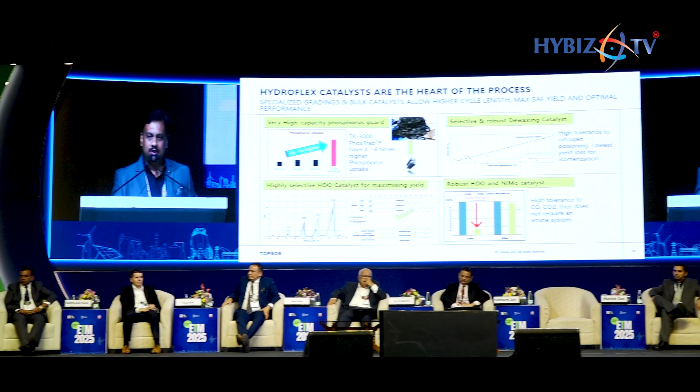Topsoe also has a robust dewaxing catalyst and a highly selective HDO catalyst, which prefers the HDO route.

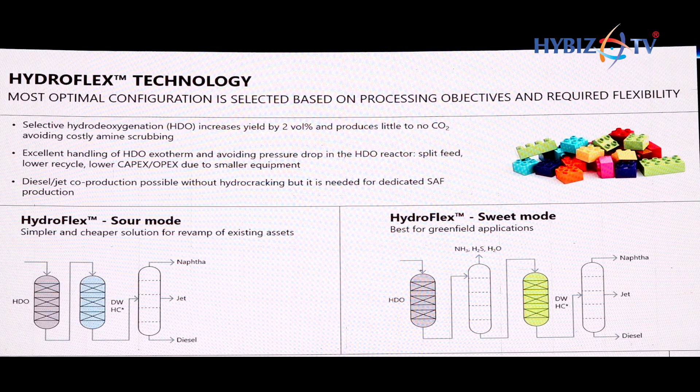If we go into the process, there can be two modes: sour mode and sweet mode. The only difference is that in sweet mode, the sour gases are removed prior to the feedstock going into the dewaxing reactor. Sweet mode can be a bit more on capex, but it gives higher yields, so NPV comes out better.

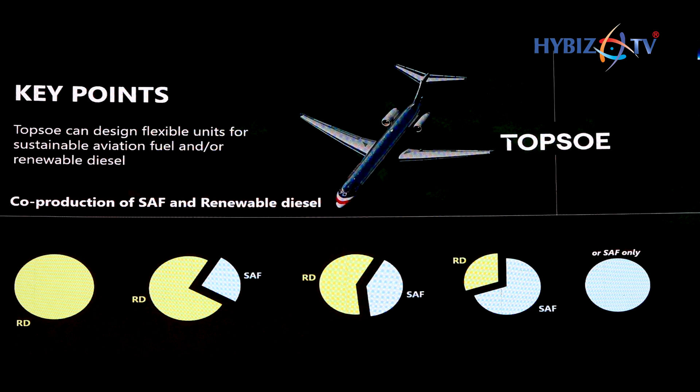The takeaway is, with Topsoe technology, you have full flexibility whether you want to go into 100% renewable diesel mode, 100% SAF mode, or anything in between. Topsoe has the solution for you.

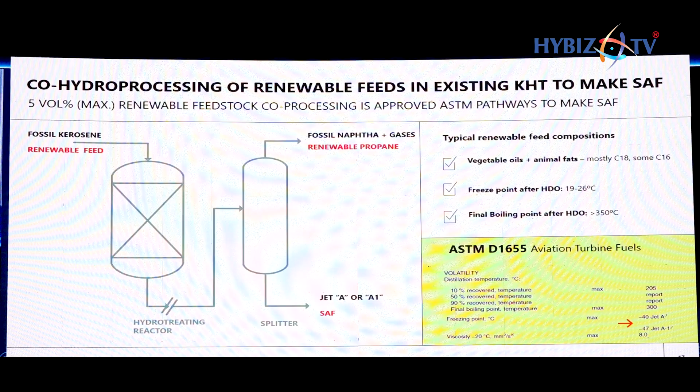A quick look into co-processing. If you want to use the existing fossil unit, we have something known as co-processing. It's an ASTM certified method - 5 volume% renewable feed can be used along with 95% fossil feed to get SAF. This is also certified under D1655, same as ATF.

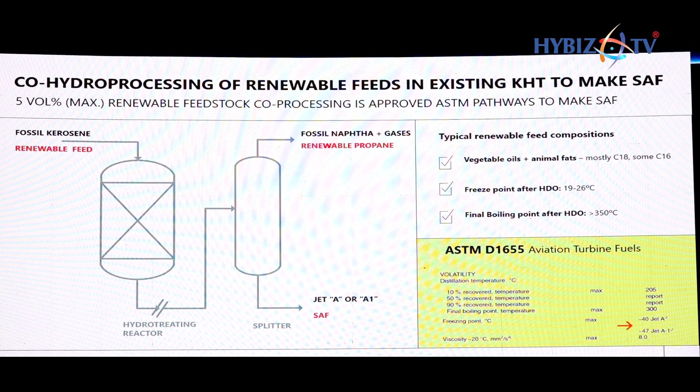What we try to do is a catalyst reload in the existing reactor. The top has HDO, HDS catalyst, and the bottom has dewaxing catalyst. We are glad to inform that IOCL has shortlisted us for the co-processing method at its Panipat unit.

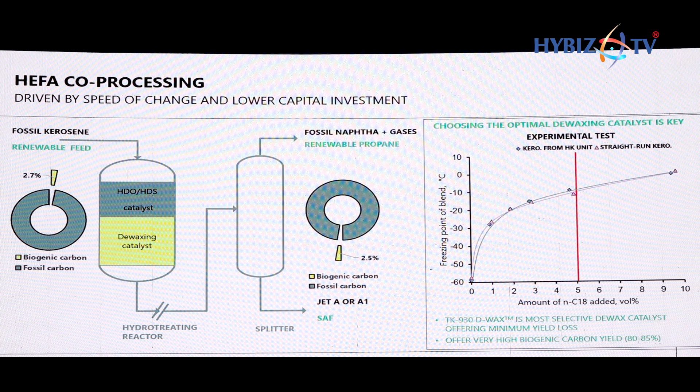I'll now invite Raju on stage to cover G2L.

Hello, can you hear me? Am I audible? Thank you very much.

Good evening. I'm going to talk about G2L technology. To start with, this is actually a unique single point licensing with Sasol - together with Sasol we can offer the complete solution.

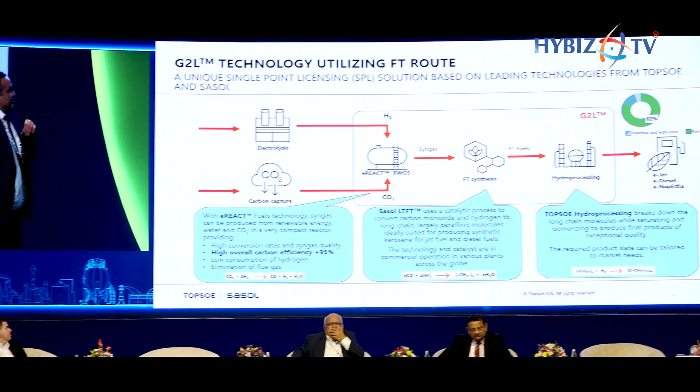This is nothing but, we need green hydrogen, we need CO2, and it goes to the E-react, or reverse water gas shift, followed by the Fischer-Tropsch, where this low temperature Fischer-Tropsch reaction takes place, and then it is basically done in the slurry reactor with a cobalt-based catalyst.

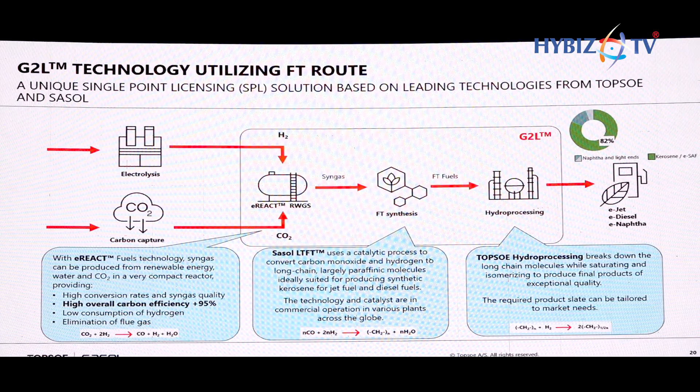Here we try to maximize the yield of the SAF in terms of FT wax. Then this FT wax goes to hydrocracking, which is conventional hydrocracking. Here we crack the molecule and make SAF molecules, and we can get as high as 82% SAF by this process.

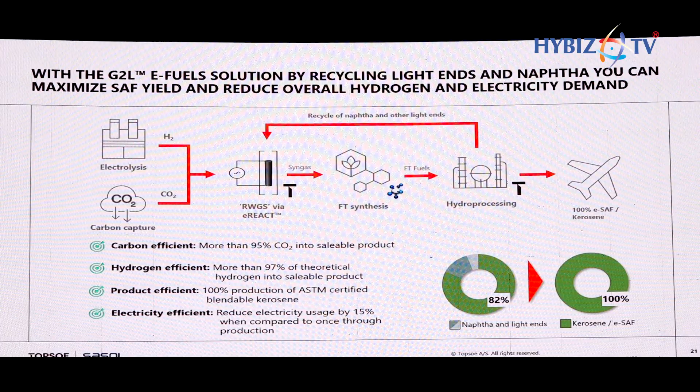Going forward, it's very important that we utilize an innovative technology module to integrate this solution. In this slide, you can see the undesired products, which are gas, naphtha, and light ends. From the hydroprocessing unit, these can go back to the reverse water gas shift, or E-react, and make more syngas.

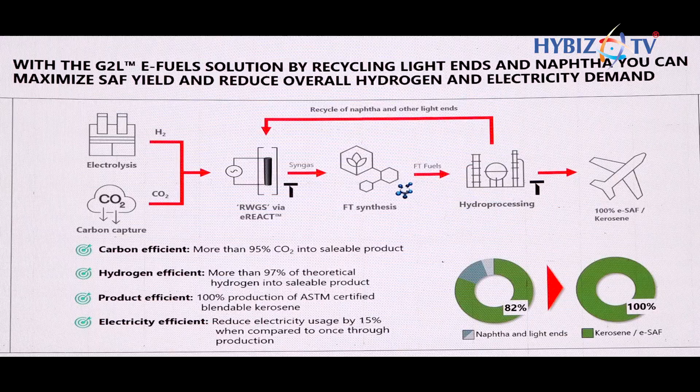So we are fully utilizing this process, increasing the process efficiency. This way we can increase carbon efficiency by more than 95%, hydrogen efficiency of more than 97% of theoretical hydrogen. Product efficiency - this product is ASTM certified. Electricity use is reduced by 15%. And the yield of SAF can be 100%. I think that is the unique part.

Further, I wish to mention we have a SOEC, solid oxide electrolysis cell. This is Topsoe's high temperature electrolyzer, which is much more efficient compared to alkaline and PEM electrolyzers. If we integrate this block into the process, it can further enhance the efficiency of the system. On the right hand side bottom, you can see electricity consumption reduced by 33%, which is reducing the levelized cost of hydrogen.

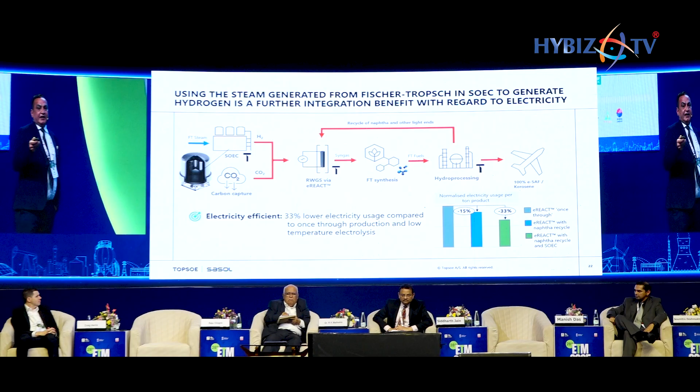I'm happy to announce that we are going to inaugurate this SOEC factory tomorrow, which is 500 megawatt capacity in Denmark.

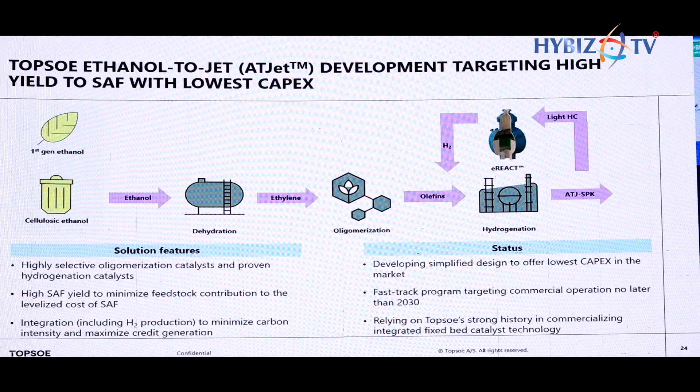Coming to the ATJ route, we are happy to announce that we are in an advanced stage of development. The goal of this process is to maximize SAF, meaning more than 90% SAF from this process with minimum capex. In this process, we have dehydration, oligomerization, followed by the hydrogenation process.

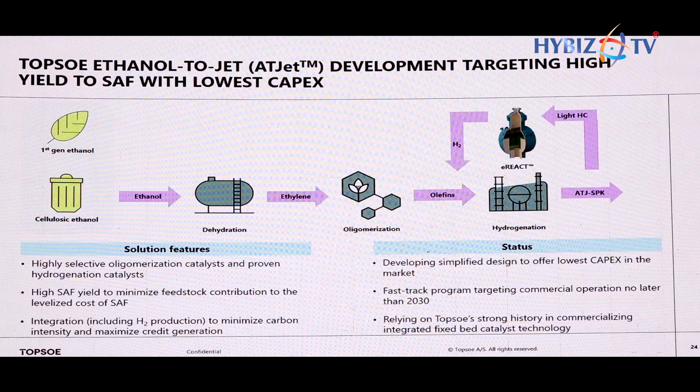In this, we bank upon our selective oligomerization catalyst and proven hydrogenation catalyst, and we try to maximize the SAF yield while reducing the cost of production of SAF. That is the key goal.

On the right-hand side, you can again see we are able to integrate the E-react module and make hydrogen, so we can recycle the undesired product and make this process much more efficient. We are quite enthusiastic about it. Our plan is that by end of this year we will complete the process, and we are already talking to clients globally for this particular process.

A little bit about the E-react. I think this is a novel technology because this is an electrified reformer. It replaces the conventional reformer, and it can take methane, CO, CO2, hydrogen, and then make the syngas.

So it can make the syngas and send it to the Fischer-Tropsch. Similarly, for ethanol to jet, we will be using light hydrocarbon, which will be fed to the E-react, and this E-react will be sending the hydrogen to the process, making it more efficient.

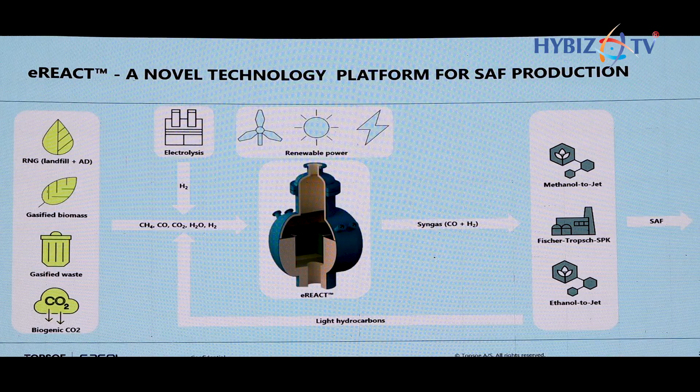As far as commercial experience is concerned, this plant has already been running for more than 3 years now in Foulum, Denmark, and has been operated on biogas, making the syngas. So it is ready for commercial operation.

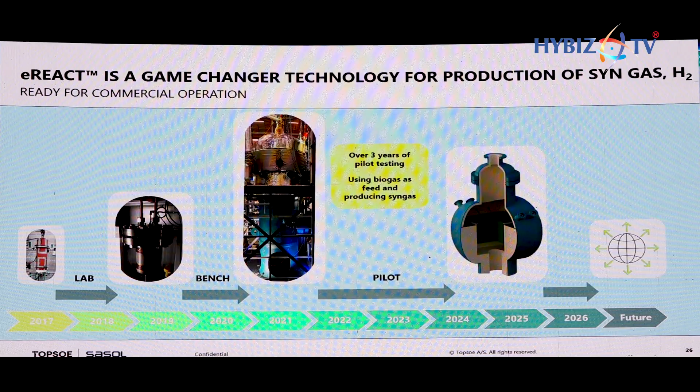We have already sold licenses to 3-4 clients worldwide, and we are very excited that this particular module is going to be a game-changer technology in energy transition.

Coming to the commercial reference, if you see the HEFA, as Manish explained, we have very thorough experience, and we are proud to mention that Topsoe is the licensor with the highest running units worldwide. We have 79 licenses for HEFA as on date.

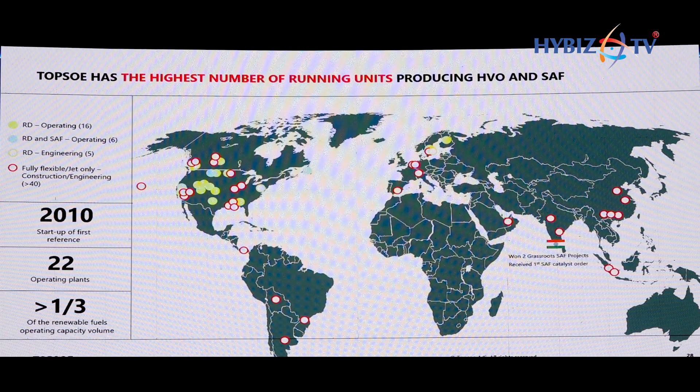Coming to the FT route, as I said, we have a technology partner, Sasol, who has decades of experience in Fischer-Tropsch technology. Topsoe and Sasol have worked together for decades, and we have many plants running. So this is a commercially proven step, and we are ready for implementing it commercially.

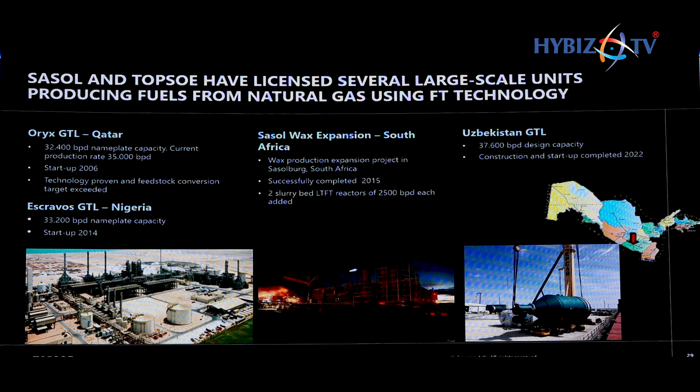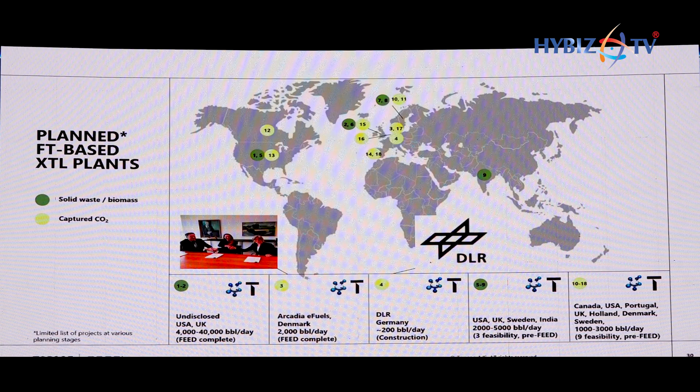Now coming to the references, we have many plants already awarded to Topsoe. I want to highlight 2 plants here. One is 2,000 barrels per day, Arcadia. This project was awarded in 2023, and now FEED is completed, it is under FID.

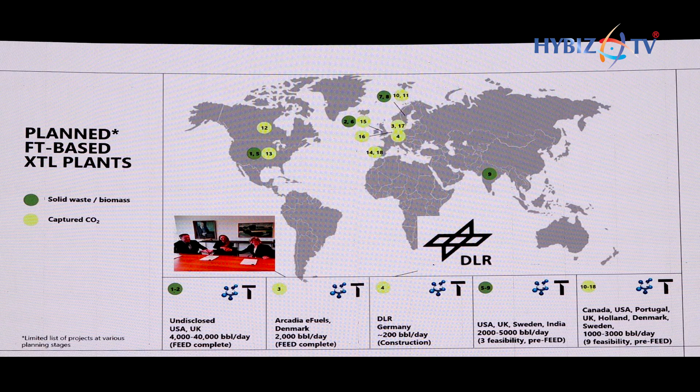The second project is in Germany, the German Aerospace Center. This is 200 barrels per day, and it's going to be commissioned by 2027, where they will be making eSAF from CO2 and green hydrogen.

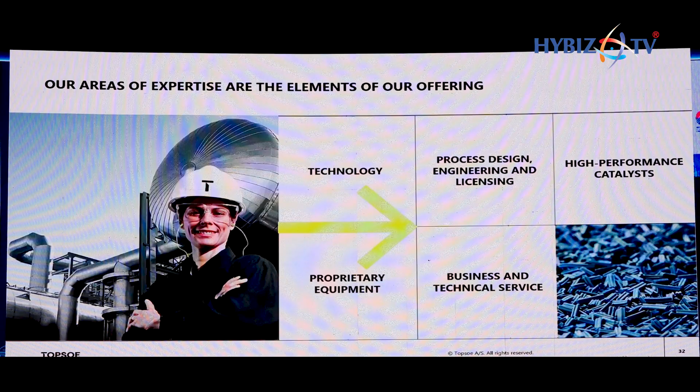Now for the last few slides. Overall, as Topsoe, we can offer this technology as a single point responsibility, because we have the technology, license, high performance catalyst, equipment, and technical service.

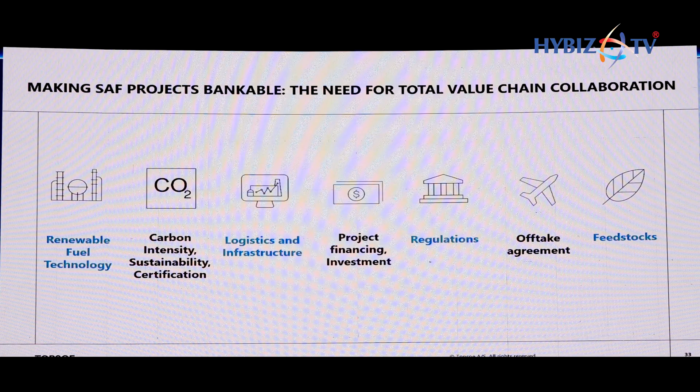If I look overall, what makes a project viable? You need a well-proven technology, a licensor who can supply it as a single point responsibility, logistics, project financing, regulation, off-take agreement, and of course the feedstock.

I want to finish my talk with a very short video, which I am going to play.

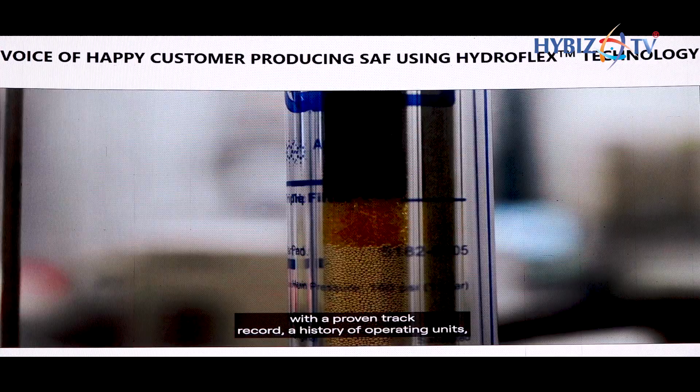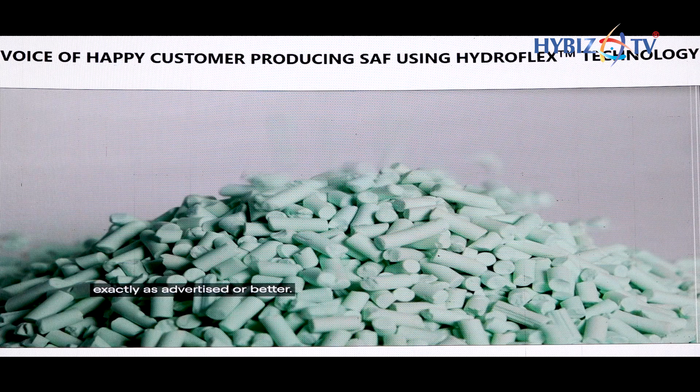Somebody in Topsoe saw a puzzle within our data and said, you better keep an eye on this. You might have trouble down the road. That's unparalleled. My name is Bruce Fleming, I am the CEO of Montana Renewables. We are the largest SAF producer in the Western Hemisphere. I never get tired of saying that. But we're only producing 30 million gallons per year. We're going to increase that dramatically. We think we will be at 300 million gallons per year of SAF about 2 years from now. That is 10% of the US Grand SAF Challenge that the White House put out last year. This is a mic drop moment. Little Calumet in Great Falls, Montana, 10% in 2 years' time. The way that happened was we started off with a 24,000 barrel a day cat feed hydrotreater. But here's the kicker, we had no way to fill that. So in a very classical study we said, what can we do with all of this idle capability? We ran into renewable fuel. We'll switch the feedstock to renewable feedstock and rearrange the rest of the refinery accordingly, and that's what we did. Start to finish was 18 months. Most people take 18 months to do the initial study before they actually do any of the work. That's simply signaling what's possible. We systematically and methodically removed every risk component that we could identify and point to. Chief among those was, does the technology work? And the best way to solve that is to select a technology provider with a proven track record, a history of operating units, if not directly relevant, at least immediately transferable. And Topsoe is head and shoulders above its competitors in that regard. The Topsoe HydroFlex catalyst offering was installed in our existing hydrocracker unit. That was a very easy conversion for us. The catalyst works exactly as advertised or better, and we've been very, very pleased with the performance.